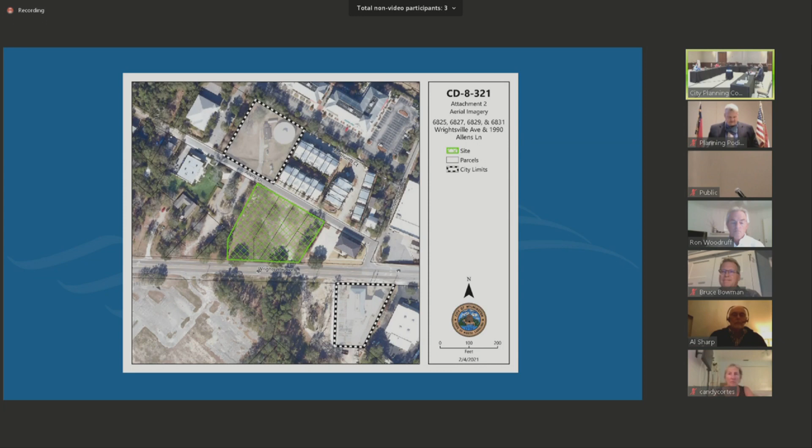This is the regional map that shows where this property is located, near Lumina Station and the Galleria site.

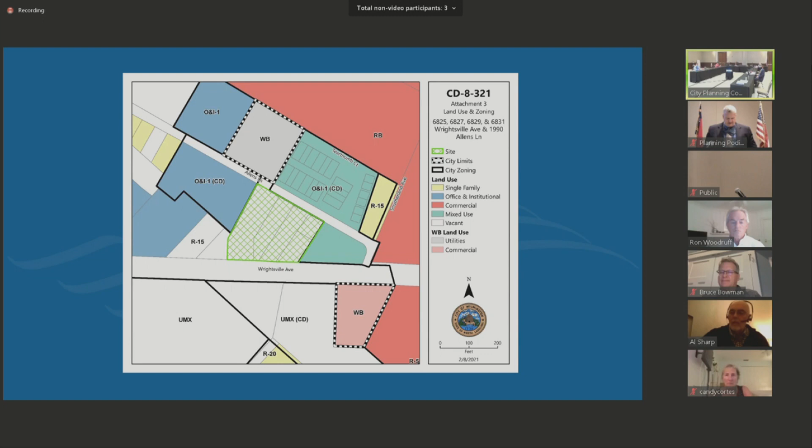The subject site was part of a 1995 annexation, effective January 31st, 1999. At one point there were 3 residential houses on site until 2012. Sometime between 2012 and 2016, all the homes were removed and the property has remained vacant.

The site is located in a watershed resource protection area and would be subject to the exceptional design criteria during the technical review process. The proposal is located within areas identified as a community connector corridor, a special character street, an urban mixed-use center, a mixed-use place, a high-capacity transit route, and a high-density transition area of opportunity on the comprehensive plan growth strategies map.

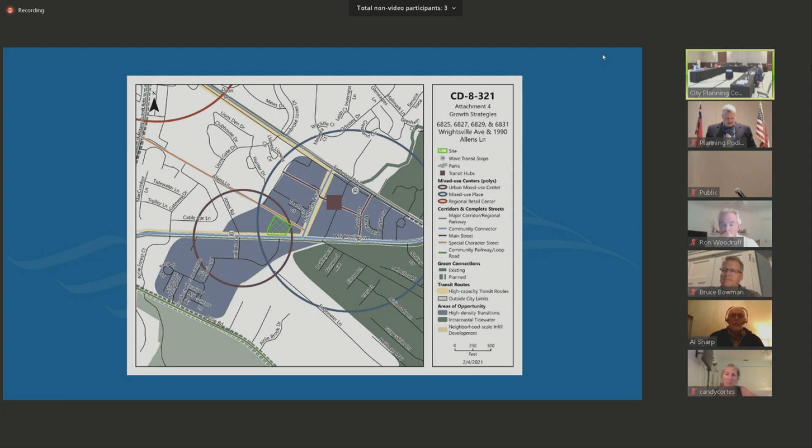The proposal is consistent with infill development in the surrounding area, with little impact to adjacent properties, allowing multifamily development consistent with the surrounding area and location near commercial services, which is encouraged.

The proposal is also located in the Wrightsville Sound Small Area Plan. The plan supports transitioning to higher density residential or commercial areas. Acceptable development patterns include non-residential uses such as office, retail, and restaurant, as well as residential up to high density multifamily. The plan also encourages using low impact development techniques to reduce impervious surface coverage and improve water quality.

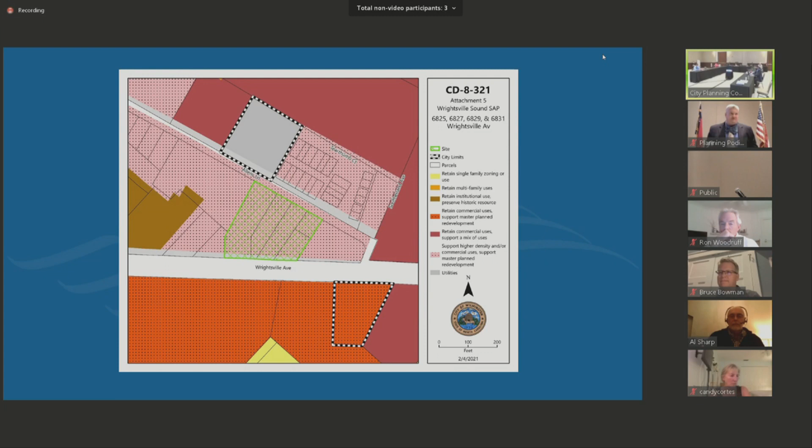The proposal is consistent with many policies of the Wrightsville Sound Plan. Staff believes the amendment is generally consistent with many policies of the Create Wilmington Comprehensive Plan, the Wrightsville Sound Small Area Plan, the Walk Wilmington Comprehensive Pedestrian Plan, and the city's adopted focus areas. Staff believes the request is reasonable and in the public interest, and we recommend conditional approval subject to the conditions in the case summary.

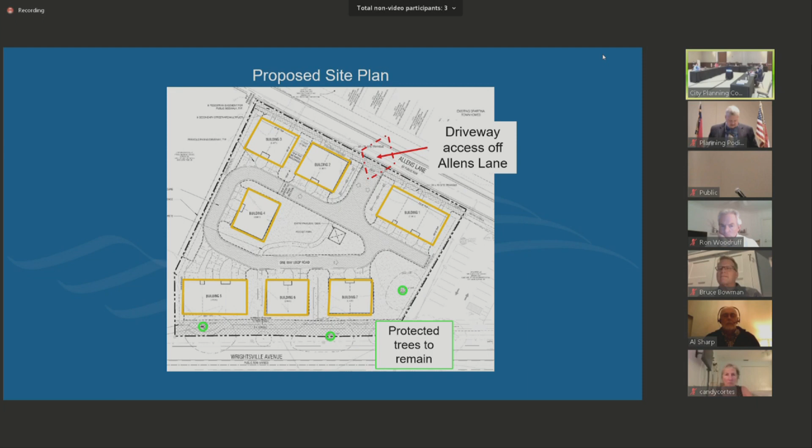I'd like to address one additional item from our staff meeting this week. We'd like to clarify one of the conditions to state that all protected trees shall be preserved unless deemed a hazard by the city arborist. We felt this was important to include; the applicant is already preserving all the trees on site and has actually reduced the project by 1 unit in regards to the trees, so we felt this was an appropriate condition.

The second condition is that the applicant is already proposing no driveways off Wrightsville Avenue; we just wanted to back that up with a condition as well. So these are 2 conditions we would ask the board to consider if they are to make a recommendation for approval tonight. I'll be happy to answer any questions you have.

Madam Chair, just a clarification on condition 9. I'm assuming you mean vehicular access via the internal drive. That's correct - vehicular access. We want to encourage pedestrian access, but it reads pretty literal that they have to be accessed via the internal drive. I can see that; our intention was vehicular access. So condition 9 could say, instead of driveway access, vehicular access - or in the second sentence, all vehicles must access via the internal drive.

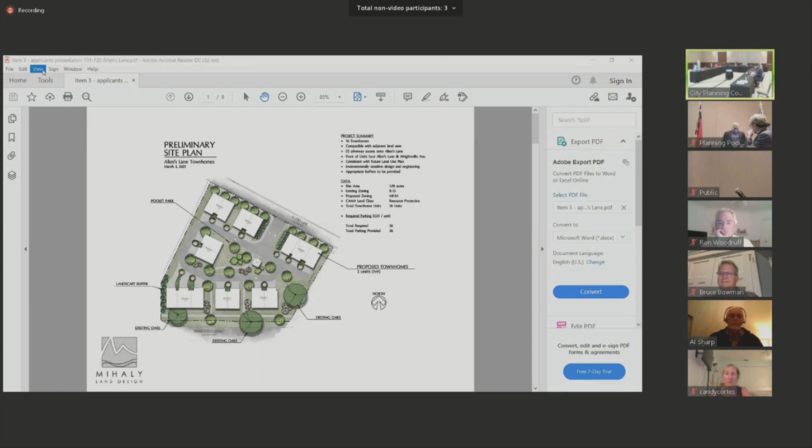Good evening, members of the City Planning Commission. My name is Josh Mihaly with Mihaly Land Design. I appreciate you continuing the planning process through this - it's great that we can continue to work together and find ways to keep the planning process going in Wilmington. I represent Allen's Lane Partners in this proposed rezoning of 1.39 acres from R15 residential to multifamily medium density to construct 16 townhome units located in 7 buildings.

We've been fortunate over the years to be involved in many successful projects in this portion of Wrightsville Sound. Back in 2014, we brought before this planning commission the Spartina project, which consisted of 22 townhomes and a small commercial office building - it was very successful. We've also played a lead role in the landscape architecture of Lumina Station and the newly constructed ABC store. So we have a tie to this area, and we strive to make sure it looks good for the city. This is an opportunity to bridge the gap further with a well-designed infill development that harmonizes with its surroundings.

The Wrightsville Sound area is part of the city's small area plan. Development in this portion of the city carries additional design considerations that we are very familiar with, due to the historical character of this area. Some of the planning recommendations that Jeff also stated: support master plan development, transition to higher density residential or commercial. Acceptable development patterns include non-residential, office, retail, restaurant, duplex, triplex, quadruplex. Design should be integrated with existing development, provide parking underneath the structures, utilize low impact development techniques to reduce impervious surface, and encourage bicycle and pedestrian access and connections to surrounding land uses. All these factors have been introduced into the plan before you tonight.

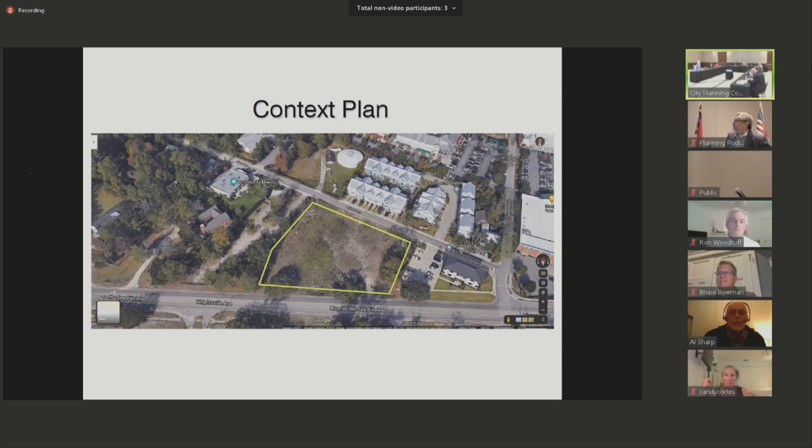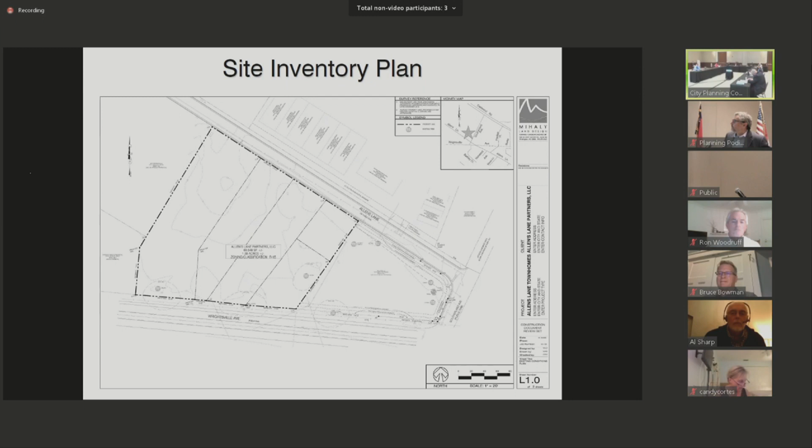This is a context plan showing the site as it exists today. I'm just going to kind of scroll through these as a site inventory map.

This is the site plan. It meets all the TRC requirements of the city. We've gone through TRC with this. This is the proposed utility plan. John Tunsel is here tonight if you have any questions regarding the utility plan.

As I stated, all the proposed driveways and the roads will be pervious, and all the stormwater will be located underground. The site has some great soils on it, so it allows us to infiltrate all the water.

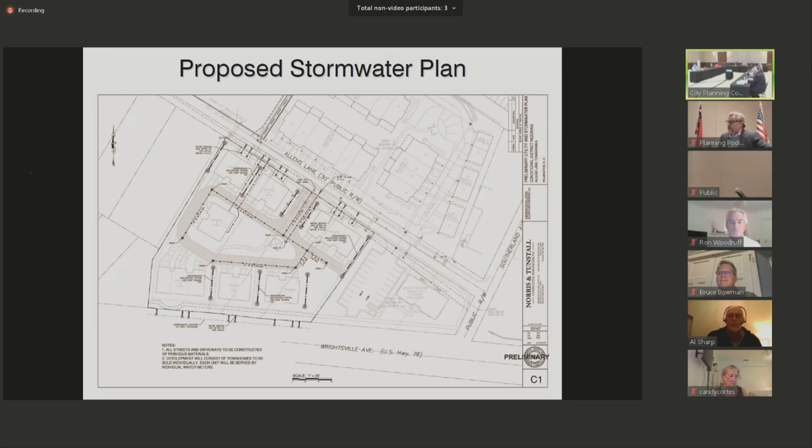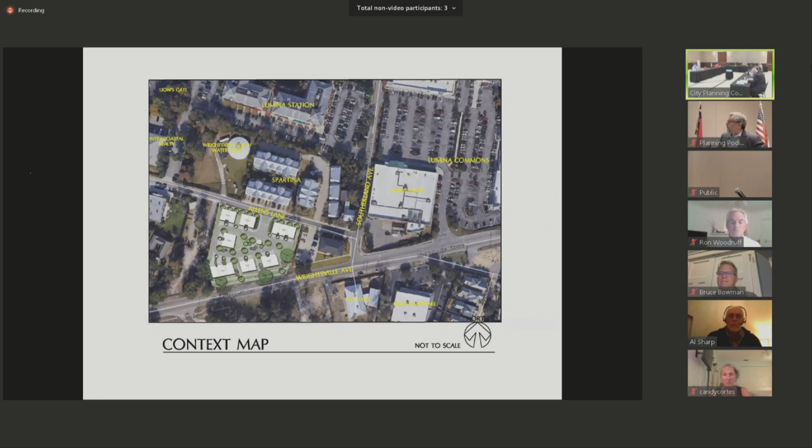I'm going to go back to the site plan. And I'm here to answer any questions you all might have.

Thank you. Commissioners, any questions for the applicant? I think I can. Thank you. Thank you.

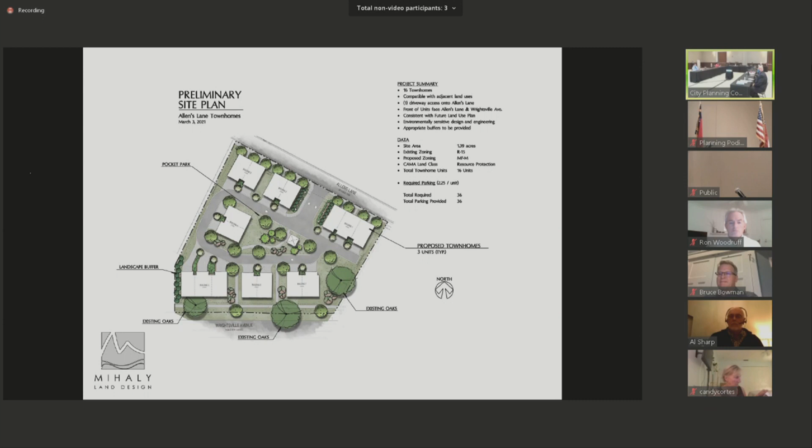All right, at this time we'll open the public hearing. Is there anyone here to speak in favor of this item? No one here to speak in favor? Is there anyone here to speak opposed to this item? No one here for this item.

And I don't think I'll verify with Ms. Bradshaw, we did not receive any comments over the web form for me to read into the record. So I will close the public hearing and ask for discussion, questions, thoughts from the commissioners.

Commissioner Bowman: I think this seems to be consistent with the guiding documents, so I'm in agreement with staff on that. And I appreciate the preservation of those 3 trees. I think that's much needed along that roadway.

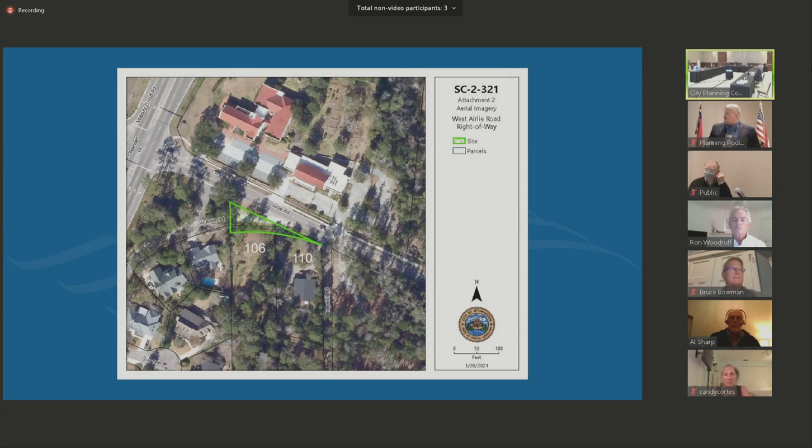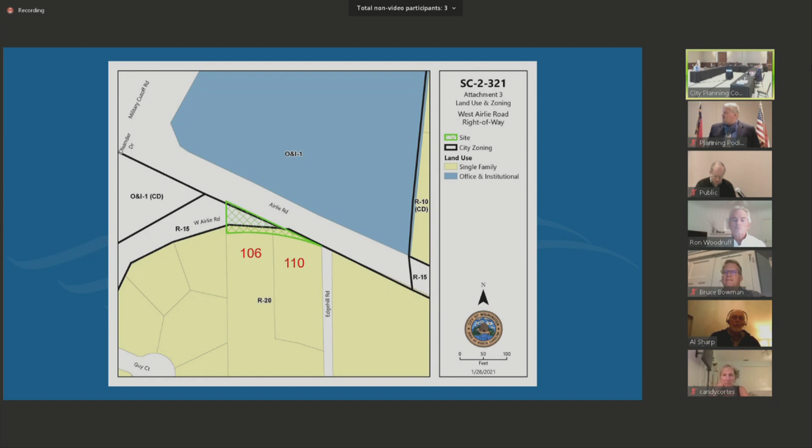This is a regional aerial of the subject site. As you can see, it's in close proximity to Airlie Road, Oleander, and Airlie Gardens. The site is located in the 1995 annexation area, effective January 31st, 1999, and you can see it's a remnant right-of-way portion of West Airlie Road.

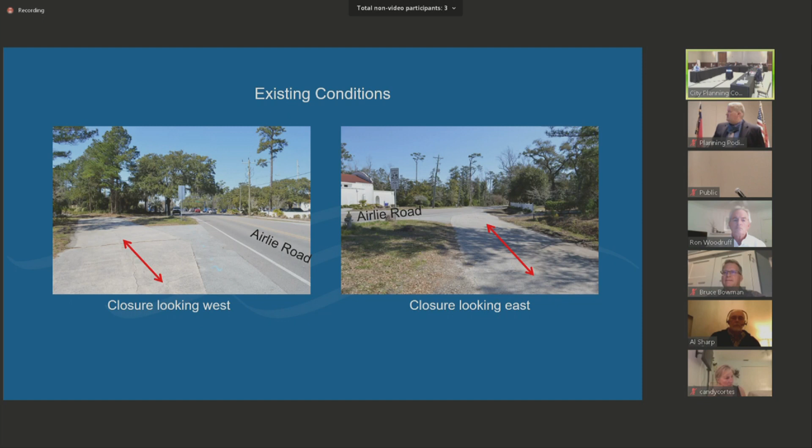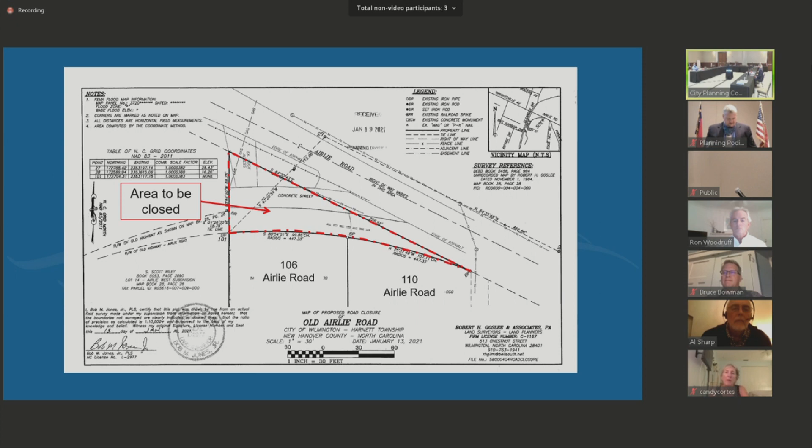As stated, the request is to close a partially improved right-of-way portion of Old Highway Airlie Road, located along the frontage of 106 and 110 Airlie Road. The triangle-shaped closure measures 207 feet in length to the west and is approximately 0.12 of an acre. If approved, the street closure request would add additional street frontage and lot area to the adjacent two lots to the south.

The comprehensive plan calls for consideration to be given to the impacts a right-of-way closure may have on the public street network, including vehicular and pedestrian mobility. Since there are existing road connections already in place in close proximity to the site, staff believes the request would not impair the surrounding street network.

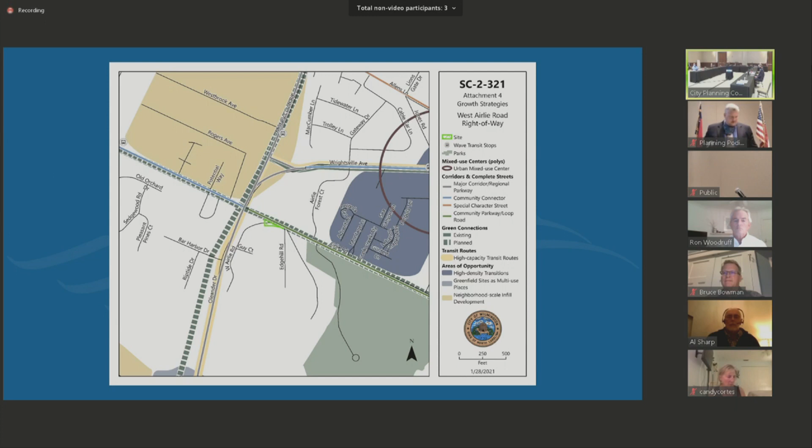The site is located within the plan boundary of the Wrightsville Sound Small Area Plan. For land use changes, the plan recommends retaining single-family zoning or use. The closure of this right-of-way may allow for redevelopment that is consistent with the recommended land uses for the area.

Closing this public right-of-way would not impair the surrounding public street network. It would not adversely impact neighboring properties. The closure would result in additional street frontage and lot area for residential lots adjacent to the right-of-way, allowing for potential redevelopment. Staff recommends that the existing water and sewer mains, future pedestrian sidewalks, and drainage from Airlie Road be placed within a public drainage utility and pedestrian easement to be recorded upon approval of the street closure.

The proposed closure is consistent with the recommendations of the Create Wilmington Comprehensive Plan, the Wrightsville Sound Small Area Plan, and the city's strategic plan. Staff recommends approval of the request. I'm here to address any questions you may have.

Commissioners, are there any questions of staff? Commissioner Sharp: My question is one of ignorance. So if this right-of-way is closed, does the land automatically convey to the property owners of the two adjoining lots?

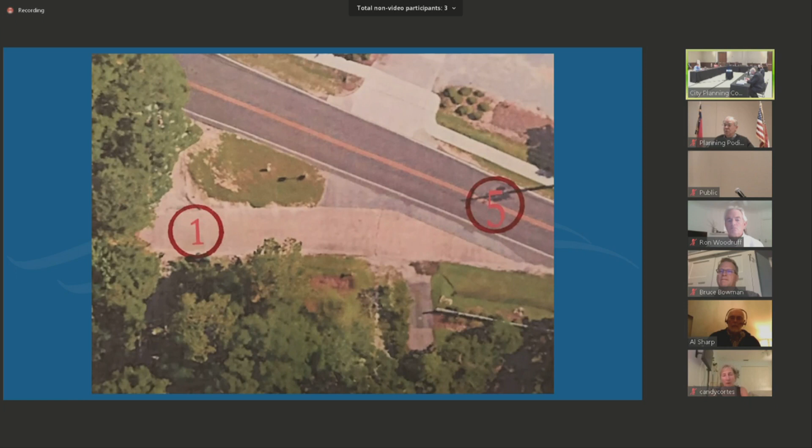Next slide, please. This is a photograph of the concrete, again the old Airlie Road. There's an asphalt patch between existing Airlie Road today and the old section, and you're looking towards the Oleander Drive intersection. In the next slide, this is looking at the same section of concrete, looking back towards the road, so Oleander Drive would be to your back.

So I think this gives you a good view of what is there. The primary concern of the applicants is to have better access directly to Airlie Road, which they do not have now. They can drive across all of this to get to Airlie Road, but they would like a cleaner line along the existing Airlie Road, taking their property out to that road. As Jeff indicated, we had a Zoom meeting yesterday with Jeff to discuss the easements that the city is requiring.

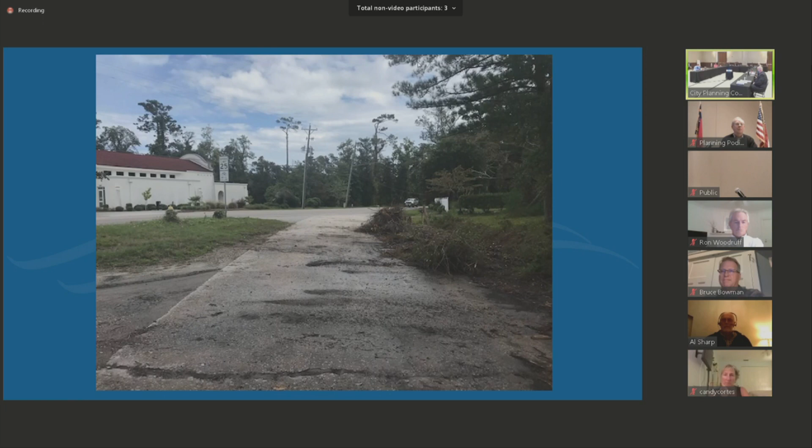I wanted to confirm one statement you made, that both of these sites are going to want to have a driveway. So it's going to go there. Right now they're going out, entering and exiting Airlie Road on the same curb cut.

No, they're not. Right now, 106 has access to this larger section of triangle. 110, which is the smaller one—could you put up that last slide that Jeff showed of the survey?

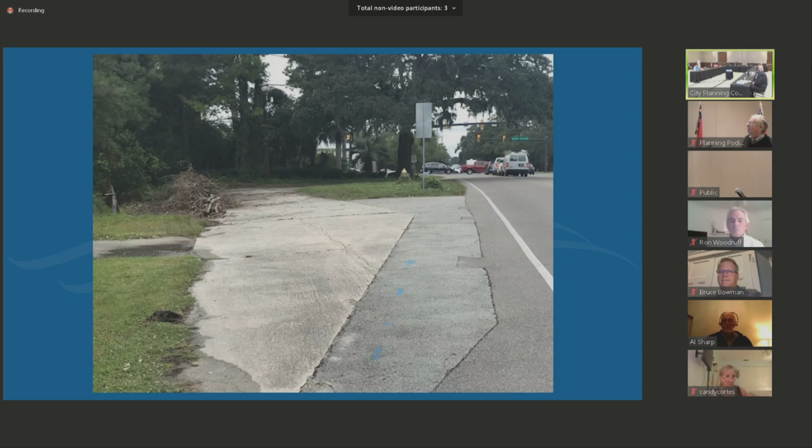Back. That one. This one right here, you can see the site on the right, which is 110 Airlie Road. It's a much smaller triangle. Their driveway runs right along the left property line of 110, and they continue to have access.

We don't anticipate that area changing much because the concrete and all the paving is already there right in front of their driveway, so they may choose to just continue to use that. For 106, the existing driveway has a little filled area with a pipe under it, on the left side again of 106, which is on the left side of this area to be closed.

So what we've talked to staff about is, since the property owner is not ready to develop the property, which is zoned R20, we've talked to staff about working out all the details within the right of way so we can determine where easements are needed and so forth. Then at some future date, what the client would like to do is just clean the area up, because it's kind of an eyesore really on Airlie Road.

Agreed. What I was getting at is, with this road closure, are we going from one driveway to making two driveways onto Airlie Road? Well, there'd be the existing one, which we don't anticipate changing. Yes, at some future date there'd be another driveway, since they're concerning two separate properties—it's not one property, it's two properties.

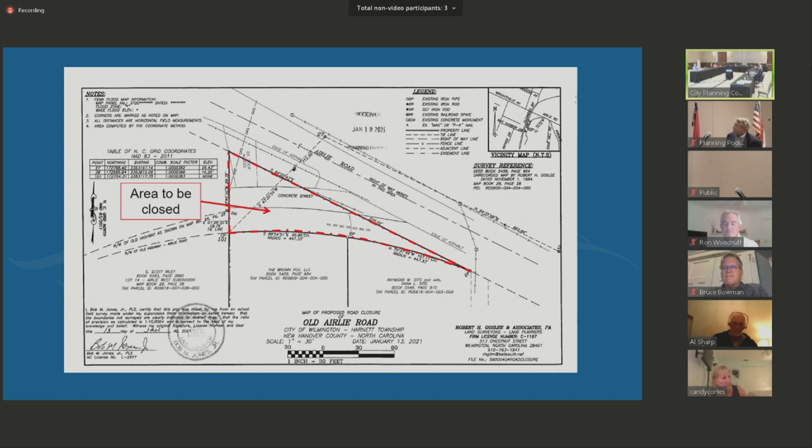Yeah, I think to properly address Commissioner Cortes's question, maybe we could have the map back up. Because we're looking at 106 and 110, I'm not sure where 122 Edge Hill is. Okay, so it's probably not on this map. Yeah, I think you need a different map that shows where Edge Hill is and how those other two properties relate.

This lot has no easement in that roadway. Is Edge Hill Road private? Pardon? Is Edge Hill Road private? Yes. Okay, so you would have to get permission from the development to access it. Yeah, we'd have to get driveway permission, get permission of my wife's aunt.

Commissioner Cortes, did you have any follow-up questions to that? No, it just seemed, looking at that, it would be a little bit safer to be able to access Airlie Road through Edge Hill rather than having two more driveways coming right out to Airlie as you turn there. That would be my concern.

I'm sorry, I didn't follow the question. Mr. Brown, what we're getting at is, could both of these lots get permission from your wife's aunt to access Edge Hill Road and have driveways there instead of increasing the number of driveways on Airlie Road so close to the intersection with Military?

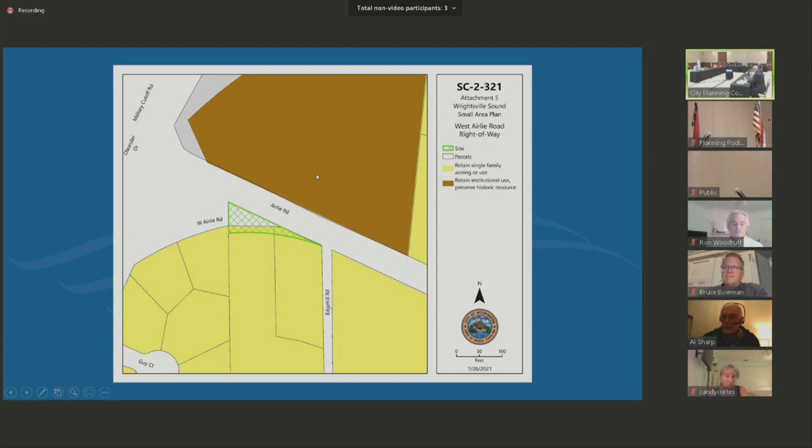Oh, that's right, we have a public hearing for road closures as well. I'm going to open the public hearing for this item. Is there anyone here to speak for or against this street closure? There's no one here to speak at the public hearing, so the public hearing is closed. Do we have any comments come in over the web form? No comments over the web form. All right, now, what is the will of the commission?

Commissioner Lennon, Madam Chair, I move to approve agenda item number 4, the Airlie Road street closure, portions of Old West Airlie Road. This request is consistent with the objectives and policies of the plans adopted by the City of Wilmington: the Create Wilmington Comprehensive Plan, the City of Wilmington Strategic Plan, and the Wrightsville Sound Small Area Plan. Planning Commission considers approval to be reasonable and in the public interest, as closing this public right-of-way would not impair the surrounding public street network and would not adversely impact neighboring properties.

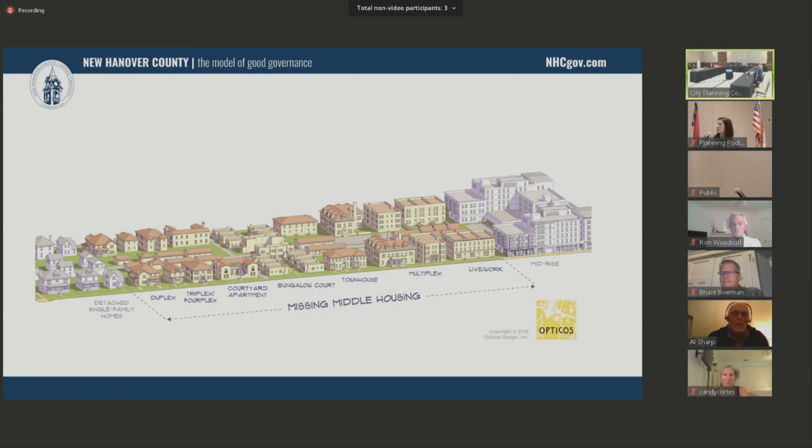Next slide, please. As far as the timeline, the Workforce Housing Advisory Committee met earlier today to start identifying goals and tools. We'll be hosting some strategy themed breakout sessions on March 16th for committee members and other stakeholders, such as yourself, to join in the conversation. As I mentioned earlier, we're on track for an April public release of the consultants' reports of the housing study and survey. Those will be presented to both the Board of Commissioners and City Council on April 5th and 6th. The committee will later present their recommended strategies and work plan to council and the commissioners at a joint city and county meeting later in April.

Next slide, please. Thank you again for having me this evening. I know everyone's excited to review the reports and have some actionable items to address housing affordability in our community. So I provided our contact information and hope you can join us at one of our breakout sessions. But Suzanne and I are happy to answer any questions you may have.